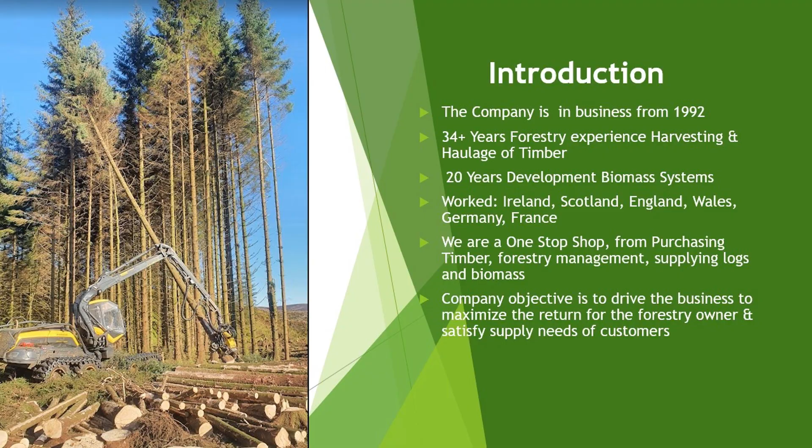Worrell Timber Group, who are we? Worrell Timber Group is a leading supplier of sustainably harvested woody biomass. We provide high-quality wood chip products designed to meet the energy needs of the biomass boiler across various sectors. Worrell Timber Group, what makes us stand out from the competition? Specified biomass harvesting, a harvesting system we designed. The system increases biomass recovery per hectare, potentially doubling the supply volumes. Another concern seems to be whether the volume is there. The volume is there. We heard Eugene speaking about it earlier on. Certification, we're the first company in Ireland certified under RED 2 and now RED 3 certification. LogWatch, this is a system we have designed. It controls timber traceability, security and compliance.

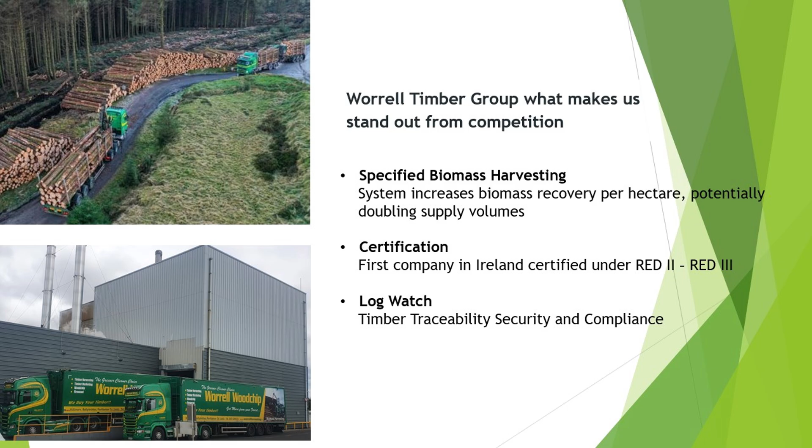What can Worrell Timber Group offer? We are the longest-serving biomass suppliers to large-scale industry users to date in Ireland. We can guarantee a supply of wood chip. Even through the issues with the felling licence crisis, all our customers got their products. There was nobody without products. We have a 100% track record in fulfilling these contracts. We can redirect large volumes of exported product to the Irish market. At the moment, there's a phenomenal amount of product going out of the country, and it's there, just to redirect it. And of course, I mentioned specified biomass harvesting. That's taking more volume per hectare off the site.

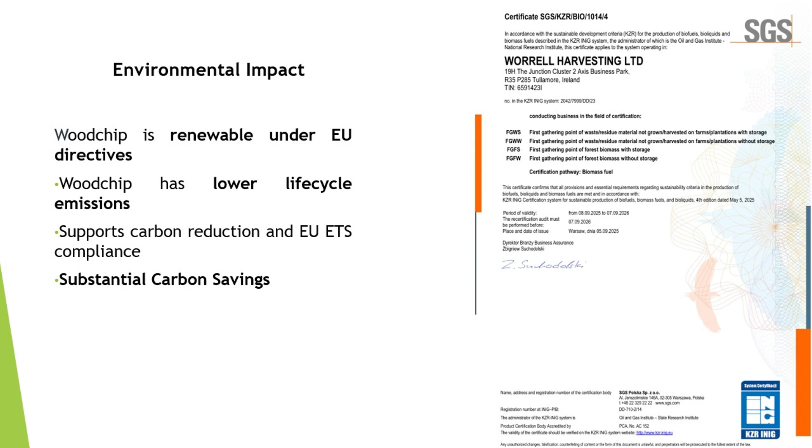The environmental impacts of wood chip or biomass. Wood chip is a renewable under the EU directive. Wood chip has low life cycle emissions, supporting carbon reduction and ETS compliance. Substantial carbon savings. To the right is a picture of our RED 3 certification to KZR. LogWatch, supplier confidence. The app we spoke about. LogWatch provides end-to-end traceability for wood chip biomass from harvesting through transport and delivery. This transparent chain of custody strengthens supplier confidence, supports sustainability sourcing commitments, and helps meet regulatory and audit requirements.

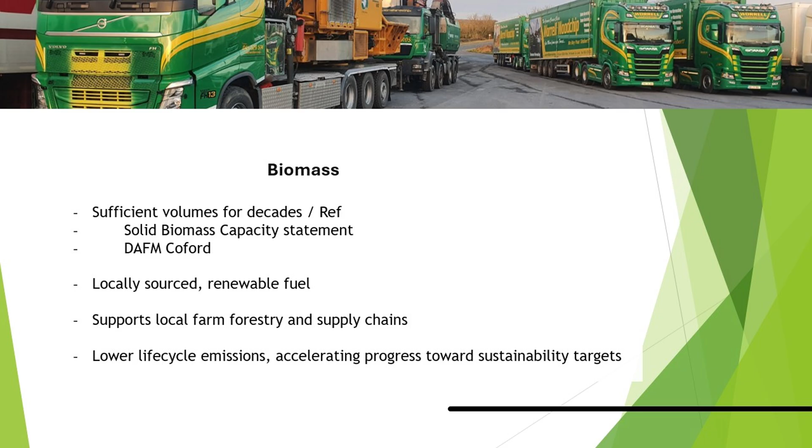Biomass itself, there is sufficient volume there for decades. We see that from the solid biomass capacity statement from the Department of Agriculture, Food and the Marine, COFORD, that Eugene mentioned earlier. It's a locally sourced renewable fuel, supports local farm forestry and supply chains, lower lifecycle emissions, accelerating progress towards sustainability targets. There was a report that was done up. It compares wood chip and wood pellet fuel in large industrial hot water and steam boilers. This report was done by a leading biomass expert in Ireland and the UK, David Palmer. It's an important read for anyone considering a biomass fuel for a large-scale project. A 53-page document available on request, some of which is summarised below.

The efficiencies you can get out of a biomass boiler can be over 100% if you capture the energy from the flue gas. Maintenance, maximum efficiency is maintained if maintenance is done correctly. Health and safety, lower risk than fossil fuel, but there are considerations.

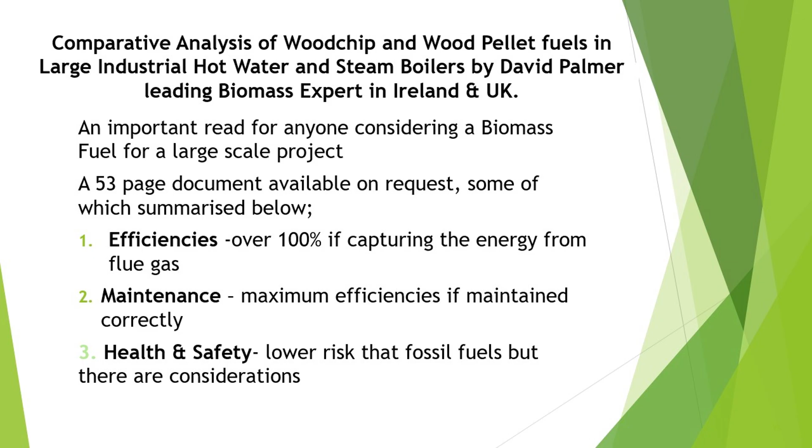Wood chip boiler performance and efficiencies. Annual maintenance and service by qualified personnel will give decades of use. This is very important to make sure your boiler runs efficiently all the time. Wood chip will deliver high efficiencies with proper management. Wood chips can exceed 100% efficiencies with condensing heat recovery. Correct fuel boiler matching is essential for optimizing performance.

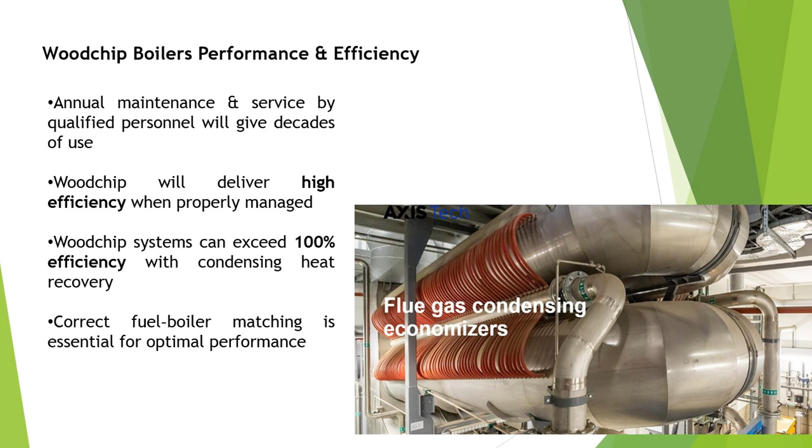Biomass boiler efficiencies from the flue gas. As we can see, with the flue gas temperatures, when you are at high temperatures, at a low moisture content product, at 10%, you're probably 5%, maybe 7% more efficient with wood pellet. Now your wood chip is a way cheaper product, but you get more efficient.

But when you extract the energy from the flue gas, and you can get it down to 40 or 60 flue gas temperatures, that's when the thing reverses around and you can get over 100%. This graph is from the report. It's also from a reference from the Handbook of Biomass Combustion and Co-Firing.

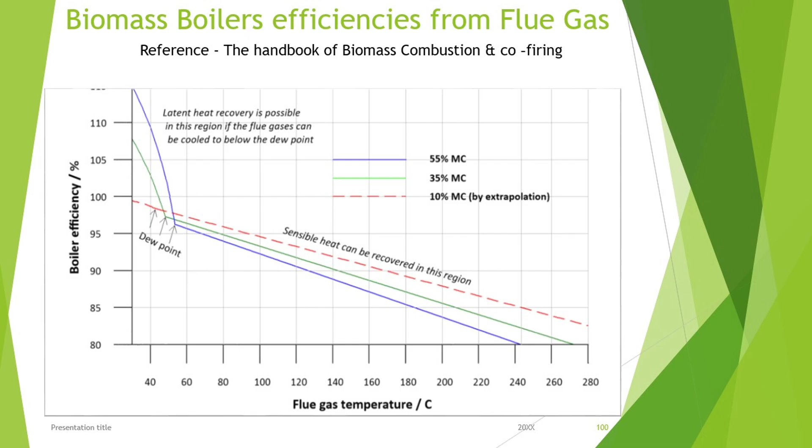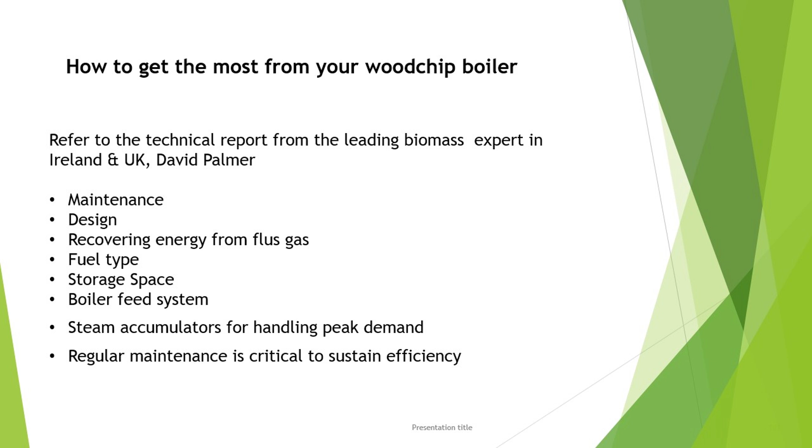How to get the most from your wood chip boiler. This is referred to the technical report from the leading biomass, David again. Maintenance is so important. Design is so important. Recovering the energy from the flue gas, the fuel type, storage space, boiler feed systems, steam accumulators for handling peaks in demand. It makes the system more efficient as well. And of course, regular maintenance is essential to sustain efficiencies.

Quality and delivery, which is all very important. Des mentioned it earlier on. So quality and delivery, moisture control, certification and operations. To ensure reliable boiler performance, we control wood chip quality end to end. The moisture content, incoming samples, covered storage and blending to target specifications. Certification and compliance, chain of custody, documenting and auditing aligning to customers' requirements.

All this is controlled by Logwatch. And delivery operations, again, that's controlled by Logwatch. Scheduling, dispatch, load tracking to ensure timely deliveries.

Health and safety, Section 4, David Palmer. There are considerations with burning woody products, biomass, and they are also in the report in Section 4.

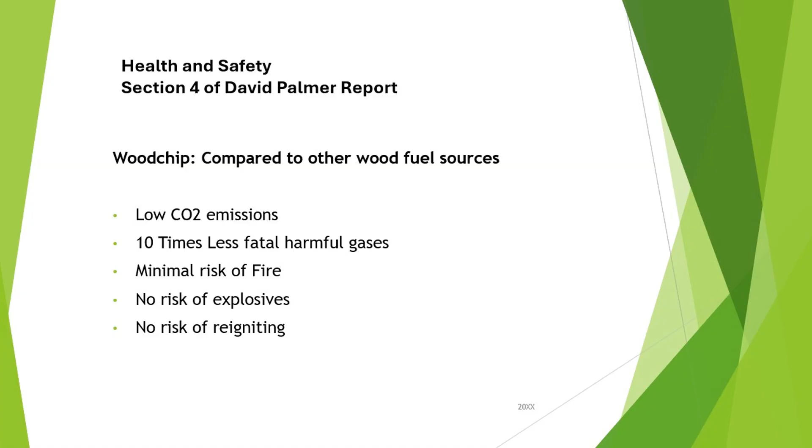Wood chip is low emissions. It's 10 times less fatal harmful gases. There's a minimum risk of fire. There's no risk of explosion and no risk of reigniting. This is all covered in the report once again. So why wood chip?

It strengthens energy security, one of the most secure energy options at this time. Delivers renewable heat on demand to meet growing decarbonisation targets. Improves cost stability by reducing exposure to volatile fossil fuel prices. It even gets more serious than that.

I was talking to an oil company only Sunday, and they said there's concerns about fuel in the future. Will they get the fuel? Forget about the price. Will you get the fuel? That will have a big impact if you could not get the fuel. Reliable long-term fuel sources. Wood chip is consistently cheaper than alternative fuel sources at industrial scale, for example, gas or pellets.

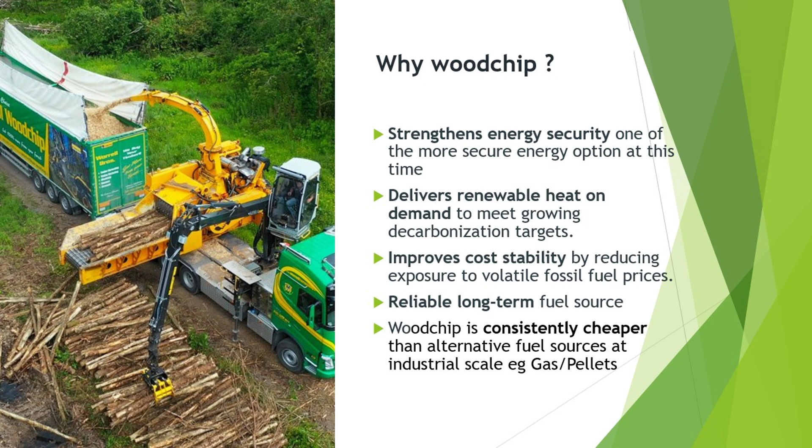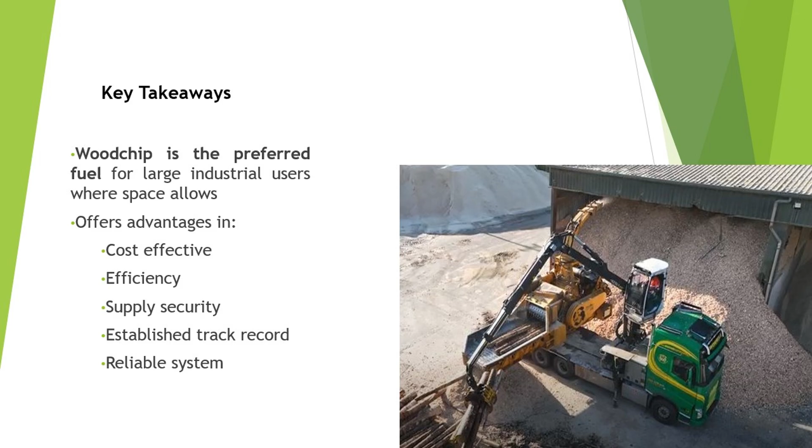Key takeaways. Wood chip is the preferred fuel for large industrial use where space allows. Offers advantages in cost, effective, efficient, supply security. It has an established track record, and there's a lot of reliable systems out there.